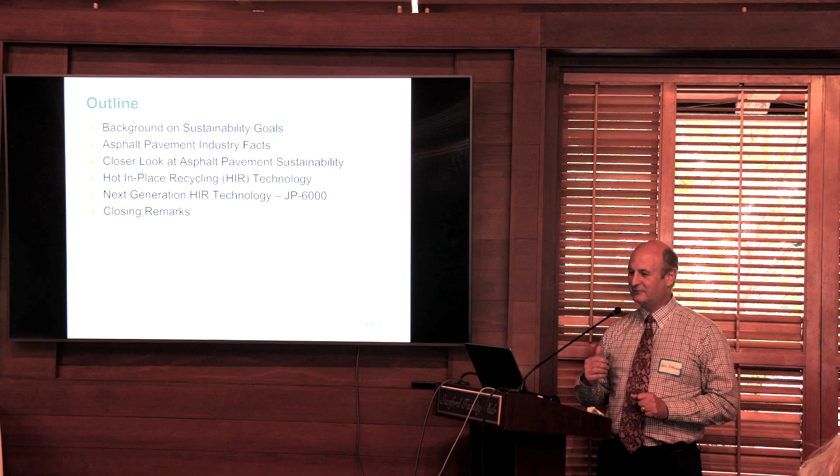Here's a quick outline of my presentation. I'm going to give you some background, a little bit of Asphalt 101, then I'll go into the sustainability of asphalt and tell you good news stories and bad news stories. Then I'll talk about in situ thermal regeneration, also known as hot in place recycling, and then the next generation of hot in place recycling technology, and then some closing remarks.

As background, I think you picked up that I'm a pavements construction engineer, but more than an environmentalist. However, let's put some context to this. In terms of sustainability, there is the United Nations Paris Agreement, which nations have signed on to, to address climate change, which is a global emergency. Emissions need to be reduced by 45% by 2030 and reach net zero by 2050. That's not too far away, and that's a commitment of the countries that have signed on to this Paris Agreement. This requires governments to take bold and immediate steps towards reducing those emissions now.

Another United Nations sustainability goal, different from the other one, is sustainable consumption and production. Our planet is running out of resources, and governments need to implement and enforce policies and regulations that include promoting circular economy practices and supporting sustainable procurement practices.

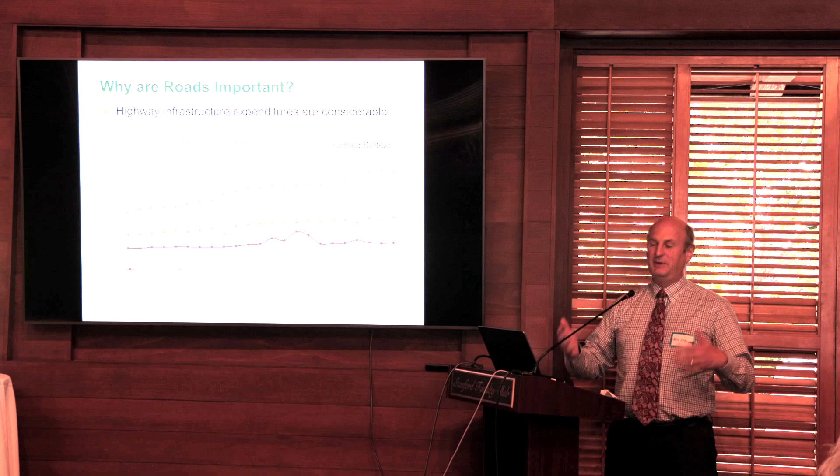So why are roads important? Well, because we spend a whole lot of money on highway infrastructure. They're considerable. This graph is from the Federal Highway Administration, for all of the U.S., all of the various government funding levels' spending. You can see the top line there, I think it's orange, spending as of 2022, $128 billion per year on highways. There are some other related highway expenditures here, but the big one is there. So $128 billion a year—there is some really good opportunity if we can bring some sustainability into our transportation or highway expenditures. So that's the good news.

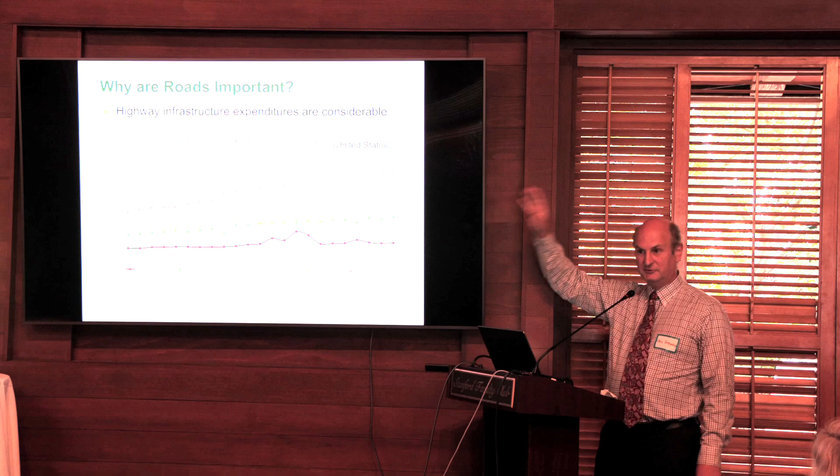Even better for those of you in government, when you look at that, depending on your level of government, you're making considerable expenditures of your budget for transportation and highways. Likely not your largest expenditure, but one of your biggest ones. But if you look at it not as expenditure, but as procurement, this is probably your largest procurement expenditure.

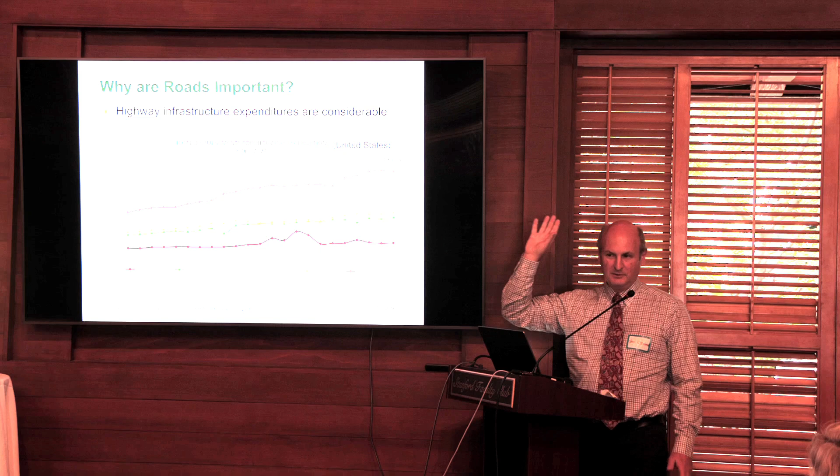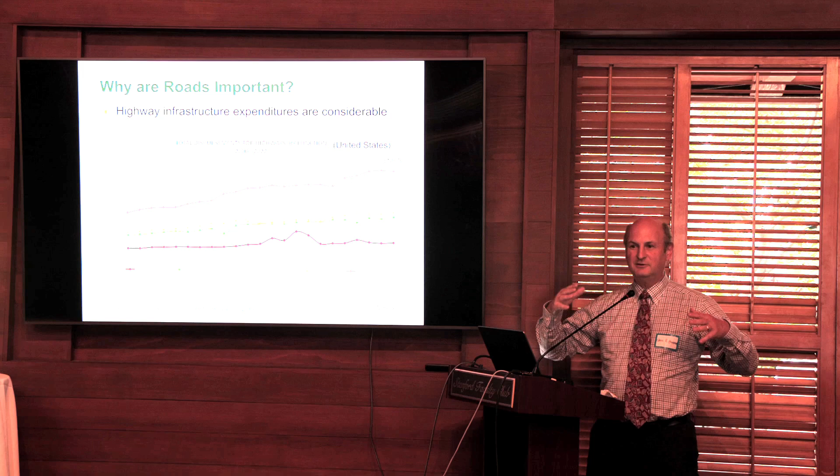Because of that $128 billion, I would say 95% of that is procurement—hiring construction firms to rehabilitate your existing roads or build new roads. Let me put that in perspective: we're not building that many new roads. We are pretty much spending the majority of it rehabilitating our existing roads. And that's mostly procured through open tenders to do this work. Some of your other expenditures, like paying teachers and so on, are very worthwhile, but don't provide the same sustainability improvement opportunities.

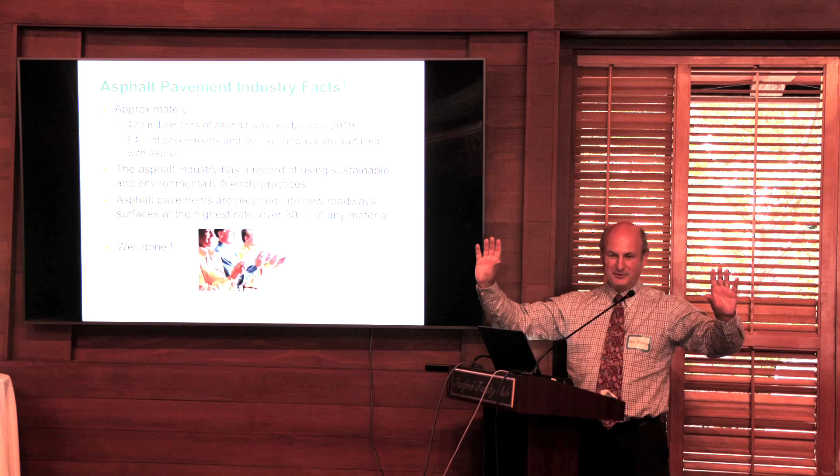Asphalt—oh, we just love it. Asphalt pavement industry facts: approximately 420 million tons of asphalt were produced in 2019, the last year for data. I'll give you some more data from other years. 94% of paved roads and 80% of runways are surfaced with asphalt, so it is a major material used for pavements. This is for America.

The asphalt industry has a record of using sustainable and environmentally friendly practices, so that's good news. Asphalt pavements are recycled into new roadways at one of the highest rates, over 90%. So again, this is good news. The asphalt industry tells you this is good news, and it is good news—we recycle those pavements. That's great.

However, let's take a closer look. Reclaimed asphalt pavement is asphalt material that is reclaimed from the pavement, either through a milling machine that grinds up the existing roadway and takes it back to the hot mix plant, or full depth removal, where a backhoe or an excavator removes that asphalt in big chunks, sticks it on a truck, takes it back to the asphalt plant.

RAP is approximately 95% good quality road construction aggregate and 5% asphalt binder. That's the black glue that holds it together. These are valuable materials for reuse. Nobody wants to put them in a landfill. Why would you want to do that? The aggregates are good, and it's got asphalt cement in it as well. Why not recycle it? And that's what the industry is doing.

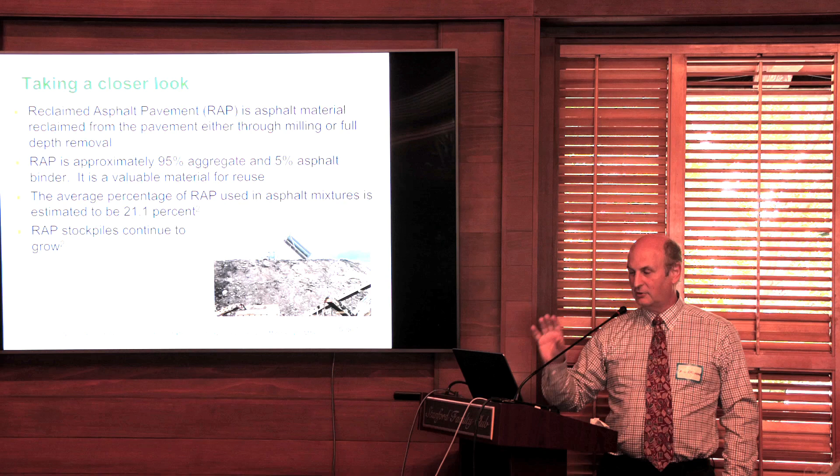So again, continuing to take a closer look at some of the maybe not so good stuff that gets lost in this message. And again, what I told you is all true, and it's all to be commended. But at the same time, a significant portion of asphalt pavement is downcycled into a lower function, such as the granular base material underneath the asphalt layer. You can kind of see that here.

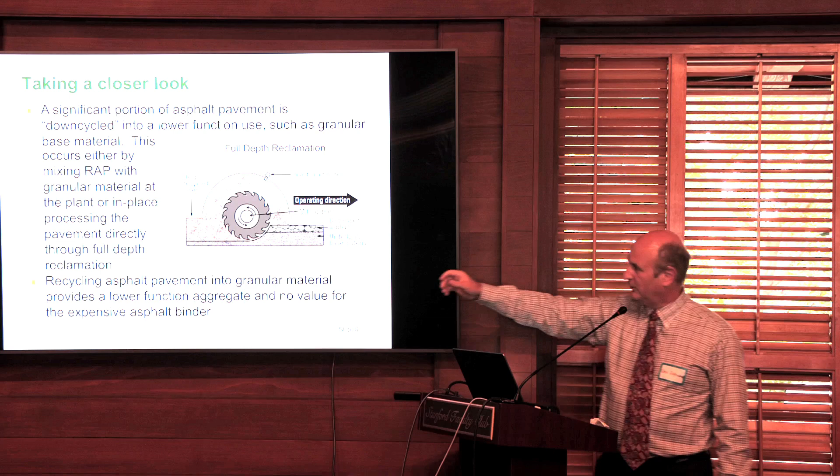Typical asphalt pavement is some layers of asphalt over some granular material. That's how roads are built. And so some of it is...

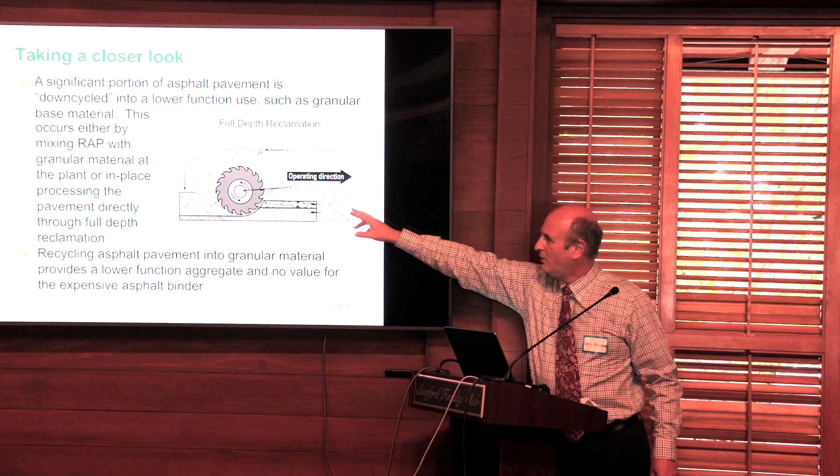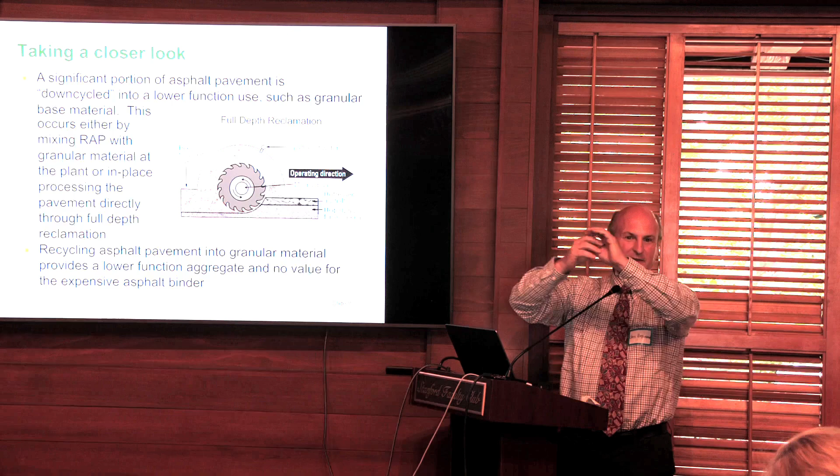This occurs either by taking RAP that is milled, taken back to the plant, mixed with granular material, and then put out during construction, or through a process called full depth reclamation, which I'm going to educate you about right here. It's basically a big milling machine that goes there and takes your old distressed pavement with lots of cracks in it and basically pulverizes it into chunks of RAP or asphalt like this, and mixes it with that granular material, and then behind it, it's all regraded and compacted nicely, making good base material.

But unfortunately, you're now using it as a granular material, not as an asphalt pavement. That's a lower function where you're taking higher quality aggregates that should be used in asphalt and using them as base material, which doesn't need those high quality aggregates. And you're getting no benefit from that 5% that was in there.

That is your asphalt cement liquid. And I can tell you aggregates are not that expensive when you compare the price of asphalt cement or the crude oil component. That stuff is expensive, and it's such a shame that you're not getting any use out of it. So I'd like to think that we can do better.

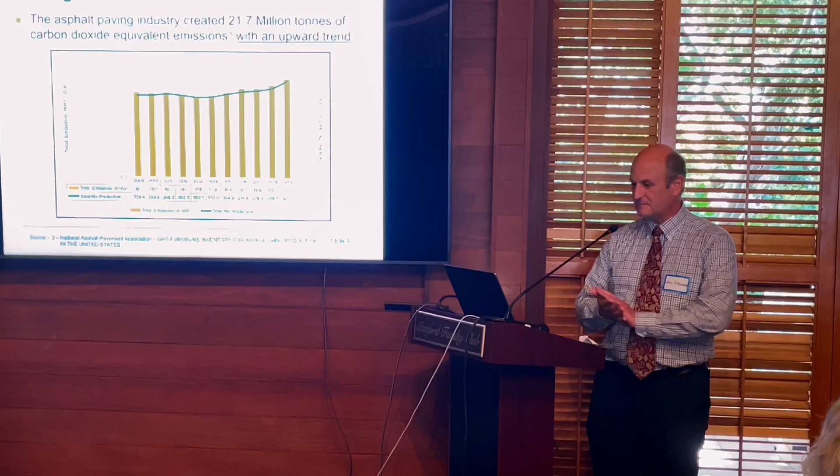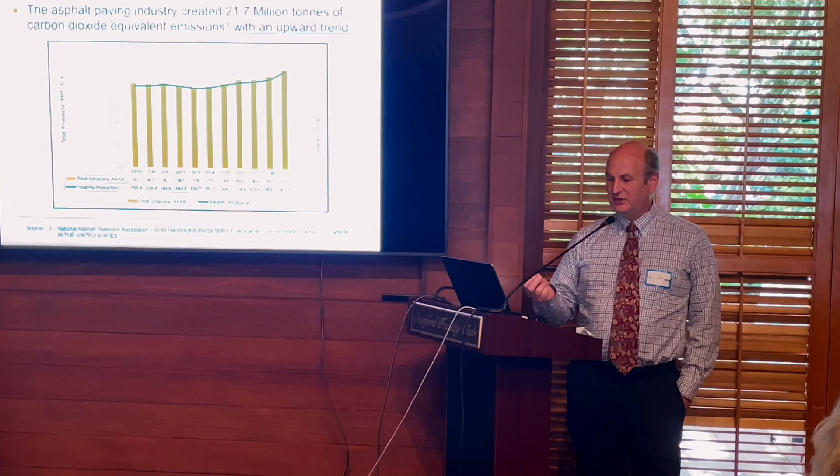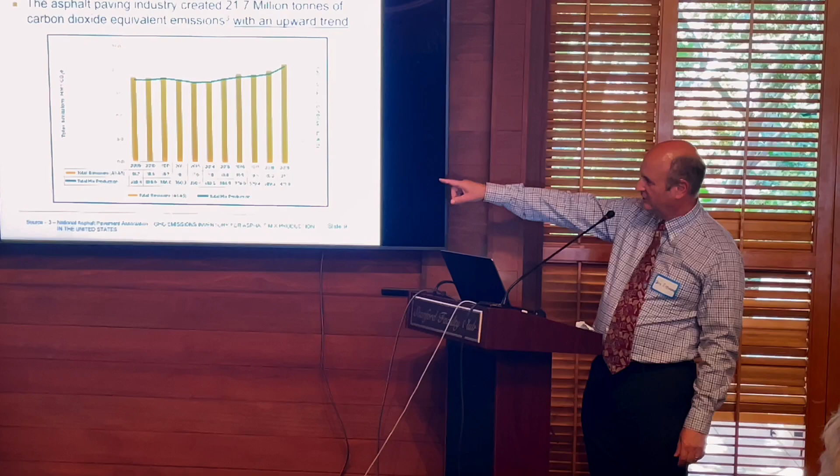So again, continuing to take a closer look at things, the asphalt paving industry created 21 million tons of carbon dioxide equivalent emissions. Here are those trends on this chart. Looking at the yellow bars, that's your emissions, and the axis is labeled on the left-hand side of that chart. So there's your emissions from 2009 to 2019, and the green line is the amount of total hot mix produced in the United States. You can see it's kind of flat with an upward trend.

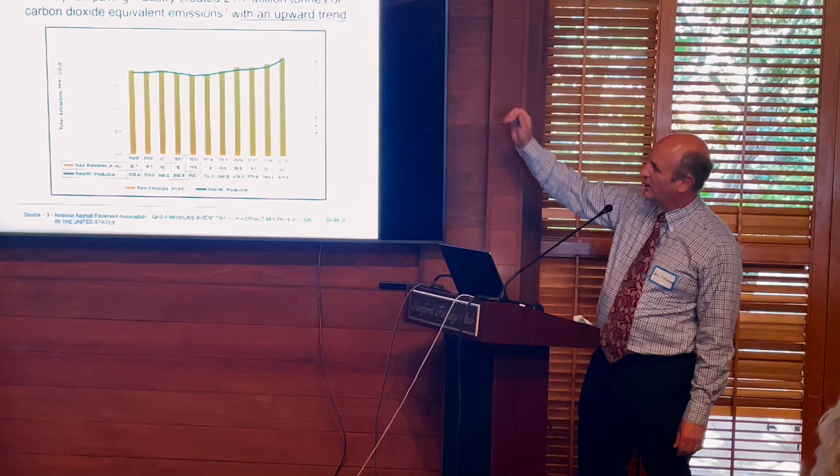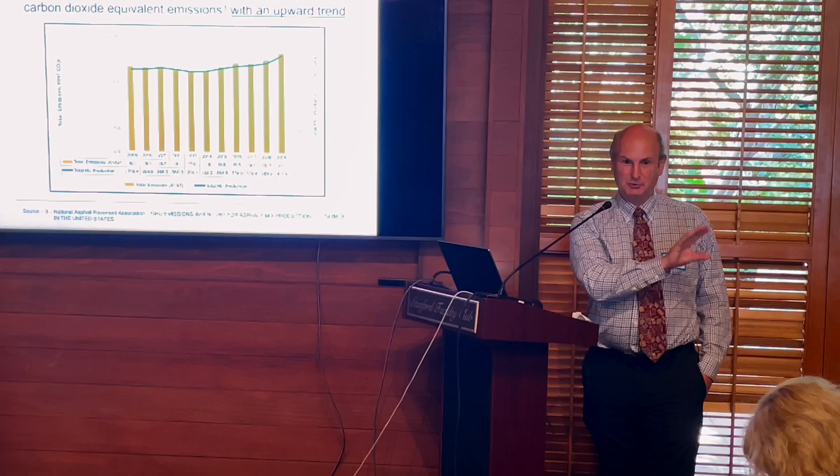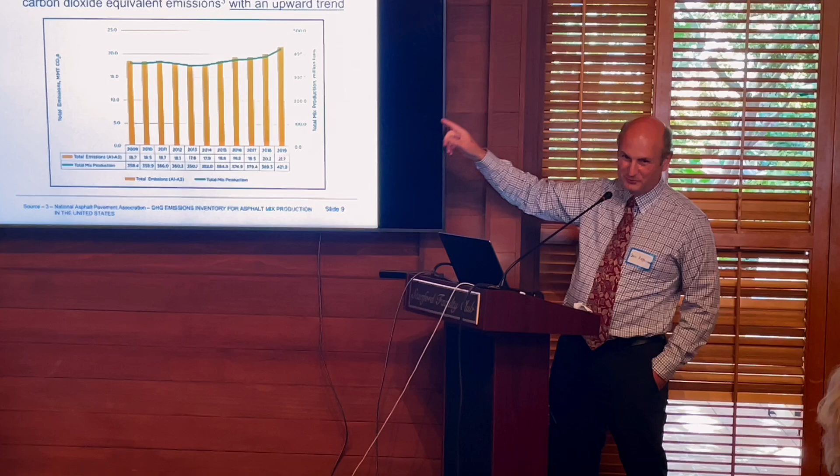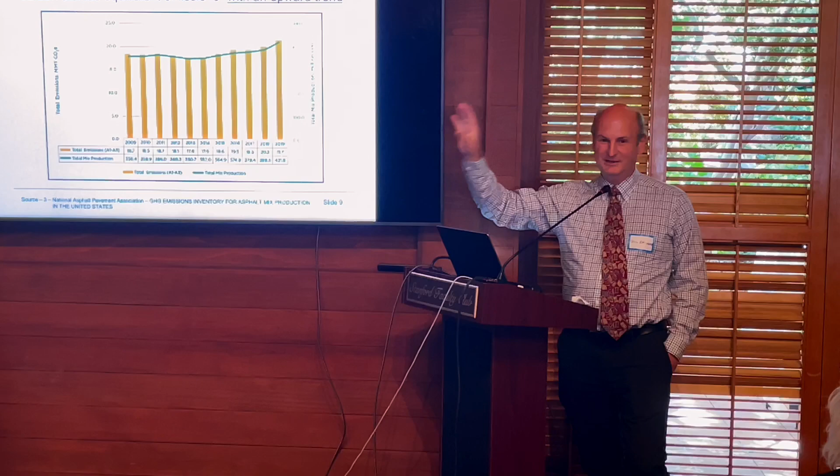So coming back to one of those earlier slides, we're going to meet, I think it was a 45% emissions reduction by 2030. There's some smart people in the room here that are smarter than me, because quite honestly, if you're asking me how this trend line here with the yellow bars on emissions is by 2030 going to get you a 45% reduction in emissions, I'm not sure how that's happening on our current course of doing the same thing over and over again, just hoping that magic line, or those bars, will start dropping. So doing what we're doing isn't going to get us there. We need to do better.

So that comes to hot in place recycling. Isn't this great? And more education on asphalt and pavements.

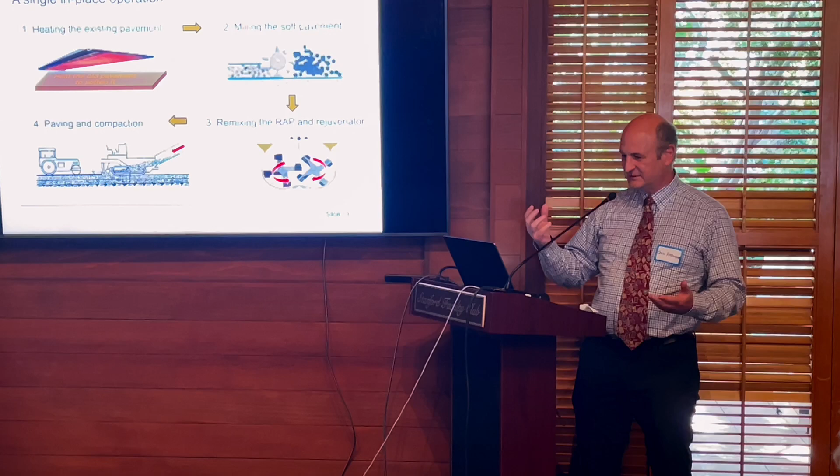So hot in place recycling is a single in place process where out on the road, equipment comes and it heats the existing distressed pavement, and that softens it up. And then that soft pavement, that hot, soft asphalt is then milled up, and then it's taken and it's remixed.

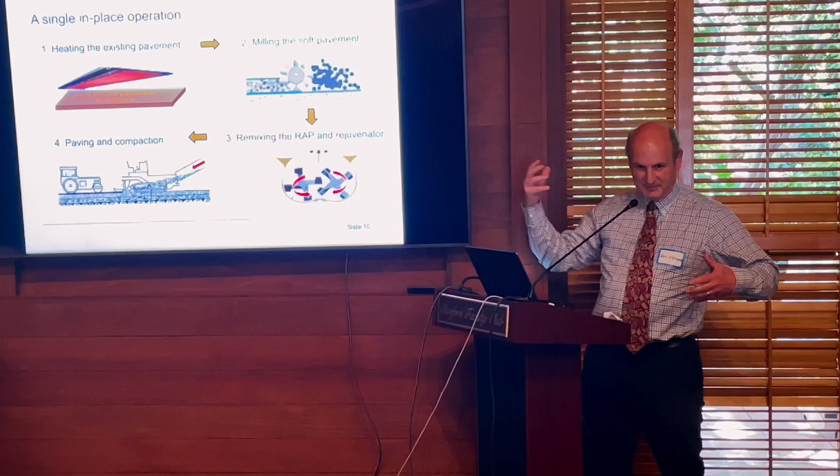That existing pavement is milled, is remixed with some rejuvenator, and that rejuvenator takes that old asphalt that may be 25 years old, and it's hardened up. It's a harder base material. It's been softened because you heat it, but once it cools down, it'll be hard.

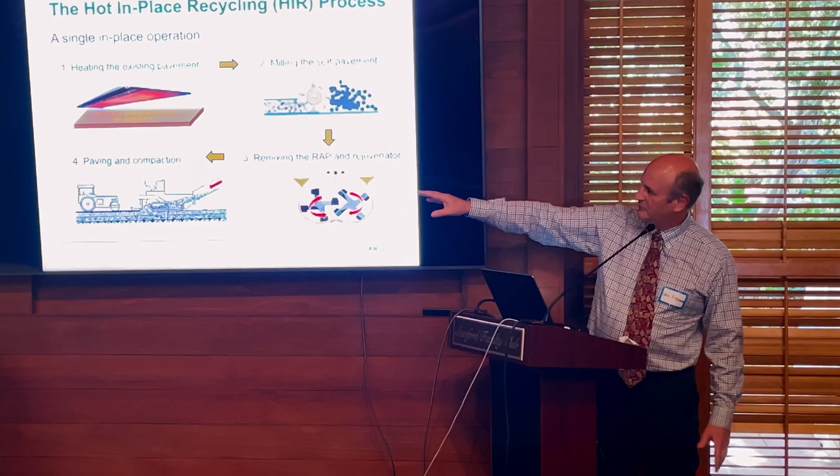So you add in a rejuvenator that sort of softens and re-energizes the asphalt cement in there, and then you run it through a paver and compact it, and you've got a rehabilitated roadway to drive on. That's all done in place.

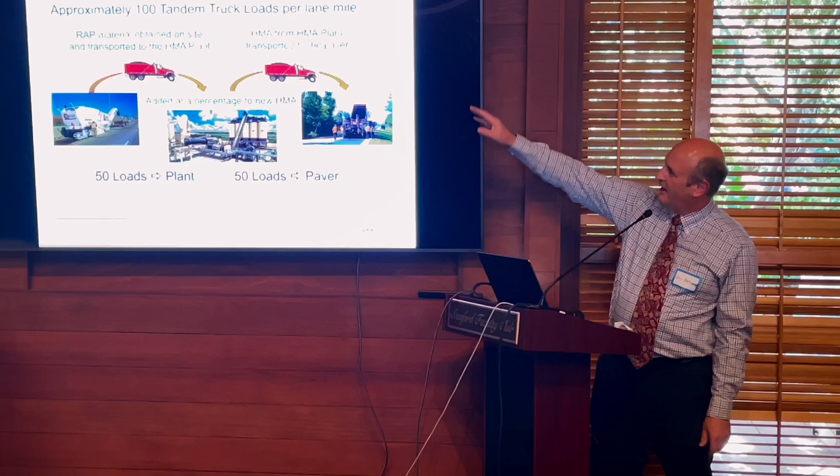Anyways, and then at the asphalt plant there in the middle, you then take 20% of that reclaimed asphalt pavement, on average, you mix that with all new material, heat it up, mix it together, and then truck it back to the paving site, and you run it through your paver. And for each lane mile that you reconstruct, there's 50 loads going to the plant and 50 loads going back to the paver. So to put that in perspective, you're using new material that has to be trucked in from a quarry or a pit.

So just to give you some perspective on comparing the two processes.

So what are the advantages of hot in place recycling? Well, the first one's one of my favorite green reasons to use hot in place recycling. The cost is significantly cheaper than conventional hot mix in the conventional process of milling and filling. The cost savings can be from 30 to 50%. That's my favorite type of green, and it's one more great example of how being green and sustainable can be cheaper.

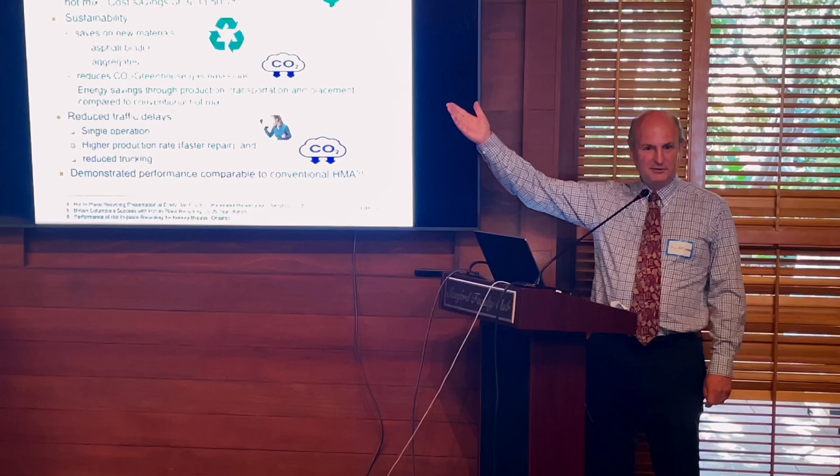Some of the more environmental sustainability aspects is it saving on new materials. Asphalt binder, it's a petroleum product, it's very expensive, and in some ways it's not renewable.

Aggregates, again, are fairly cheap, but they have to be trucked from a quarry or a pit that's often far away. Surface course aggregates can be even farther because they have to have special qualities that prevent them from polishing so that you have skid resistance. And I don't think so much in California, but certainly places like Toronto, you're trucking your high quality skid resistant aggregates over 100 kilometers, which would be 60 miles, sometimes 200 kilometers in the Toronto area, because the aggregates you have in Toronto polish and don't provide you skid resistance.

So obviously there's challenges that way, not from the environmental side of this, but just running out of those aggregate resources that are suitable. There's lots of aggregates, but are there aggregates that's suitable for the purposes that we need them for? The greenhouse gas reductions in terms of less transportation and other aspects as well in the process.

There's energy savings through the production, transportation, and placement of the materials compared to the conventional hot mix and mill and fill. Another important one is the reduced traffic delays.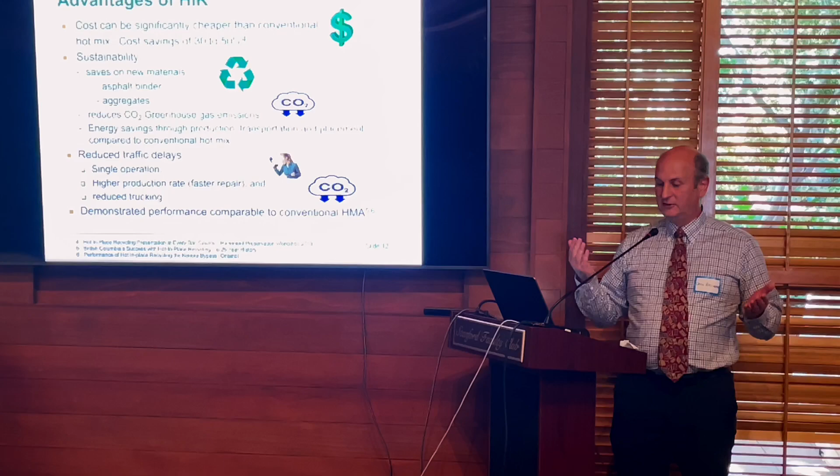Again, hot in place recycling does it - it's a train, but it does it all there on site in one operation. You also have higher production rates, so it's moving down the road faster than a conventional paver.

You know, obviously the reduced trucking of the material because it's not going back to the hot mix plant, and also bringing new material to the hot mix plant.

And of course, you can't look at sustainability without looking at performance. And this has demonstrated performance comparable to conventional asphalt. There's been a lot of historical use of hot in place recycling. British Columbia does a lot of this. Ontario does some of this. And they've done a lot of studies and found that it's comparable in terms of performance.

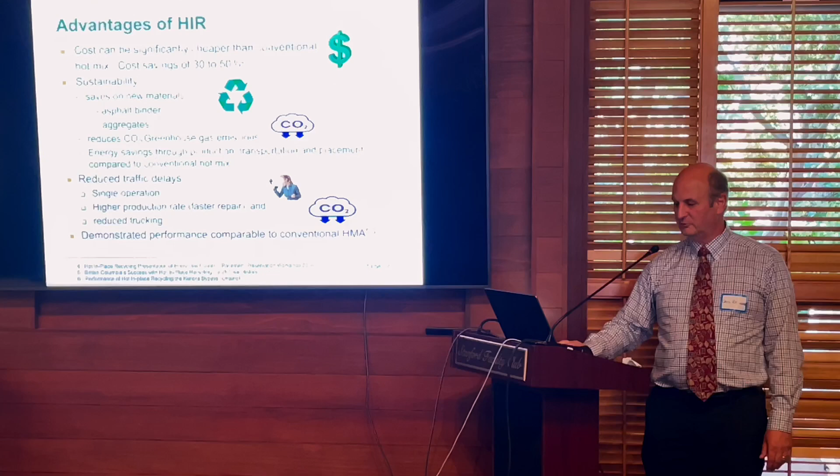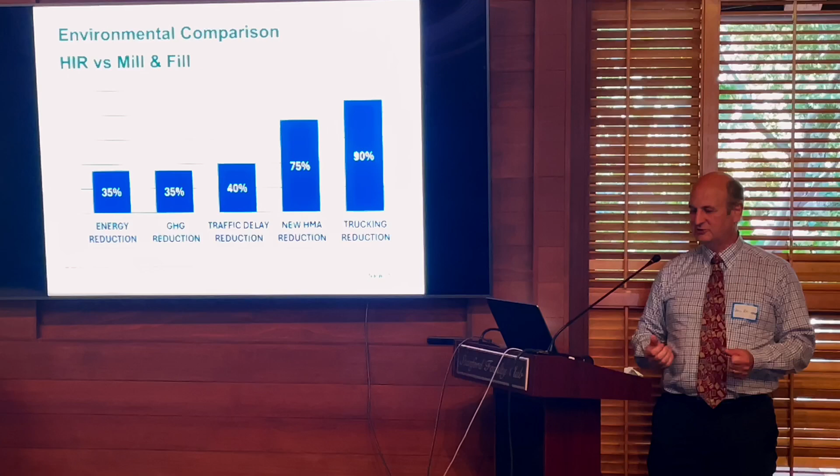Here's a quick sort of comparison of some of the general savings or comparisons in terms of 35% energy reduction, 35% greenhouse gas reduction, traffic delay reduction of 40%, new hot mix asphalt reduction of 75%, and trucking reduction of 90%.

So what are some of the challenges, or what is the challenge with hot-in-place recycling?

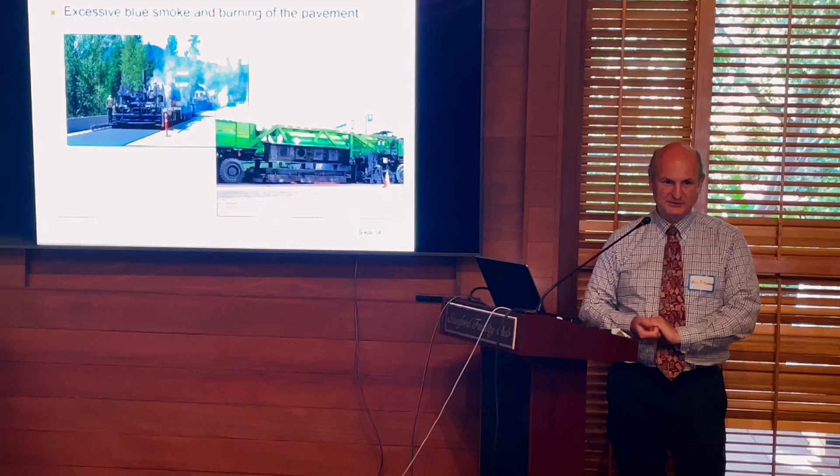This technology has really been around since 1930, but it's never really gained mainstream acceptance. And one of the reasons is some of those technologies were not the best.

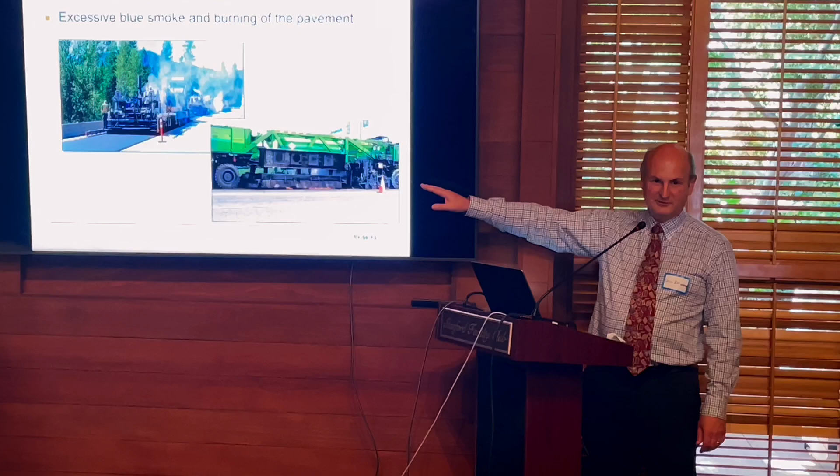Here's an example. On the left, you've got a hot-in-place process. There's a lot of blue smoke there. You're burning the asphalt, which is hurting the quality. You're also creating a bit of a safety hazard for motorists. I don't think I'd like to be one of those people on the crew inhaling those fumes and stuff like that. On the right side, you can see the open flame hitting that asphalt, and that's not good for the asphalt.

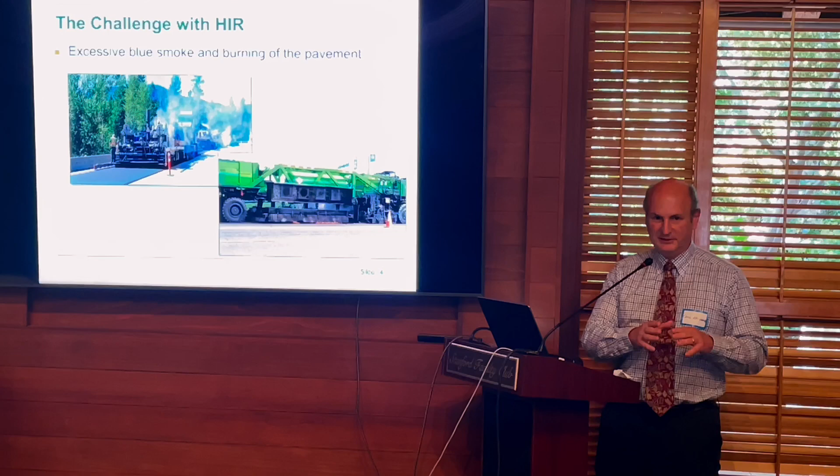It's basically burning that asphalt, and that's not good for the engineering properties of that material. Even if you try softening it, because it's burnt, it won't give you the desired performance you're looking for. Most jobs don't have this, but it just takes one job in every 5 or every 10, and someone says, I'm not doing that again, or it sounds good, but it just didn't work. And that's been one of the challenges with hot-in-place recycling.

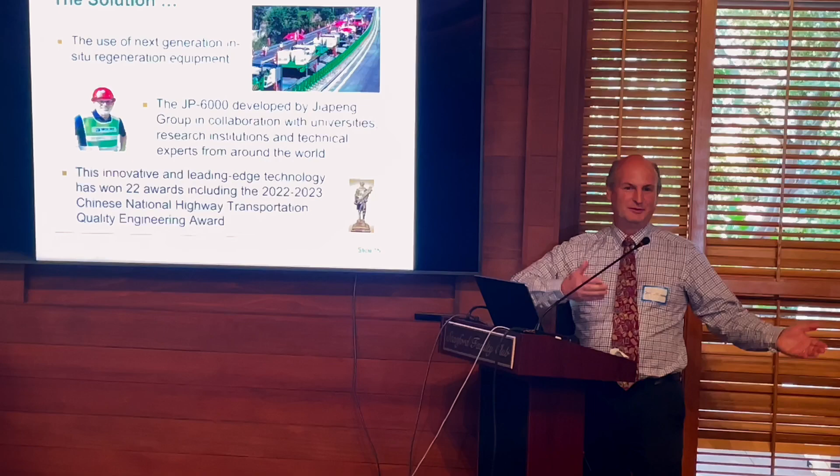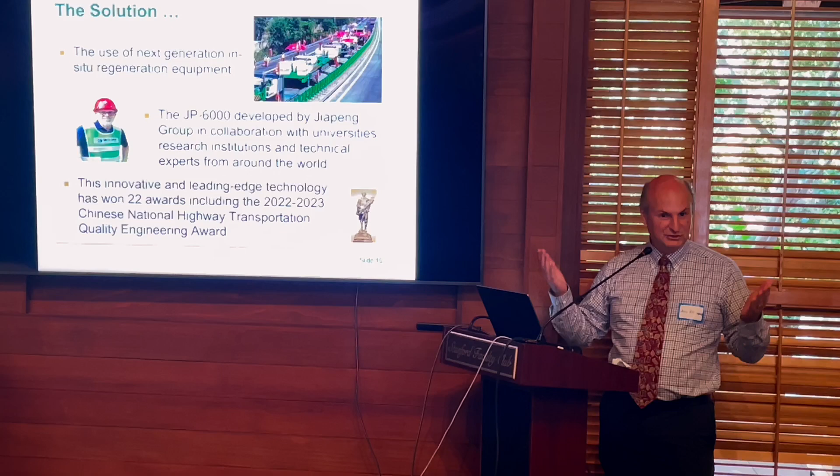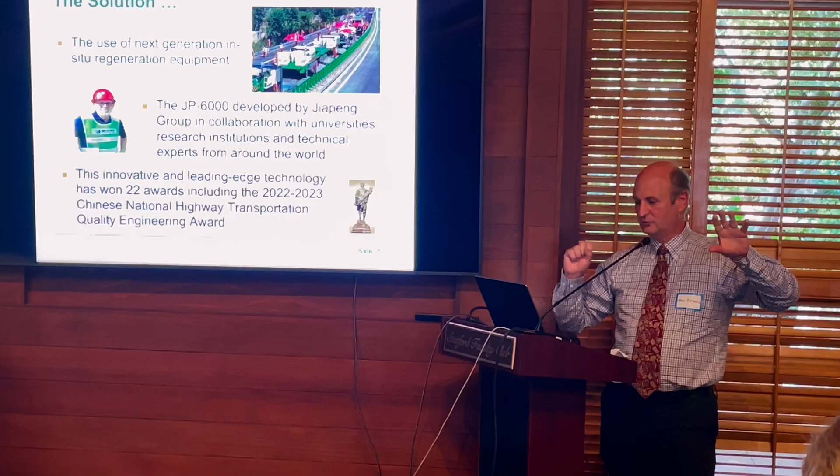However, technology is improving, and there is now the next generation of in-situ regeneration equipment. This is the JP6000. It was developed by the Jiapeng group, which is essentially a partnership with the JP Roadtech group, and also in collaboration with universities, research institutions, and technical experts from around the world.

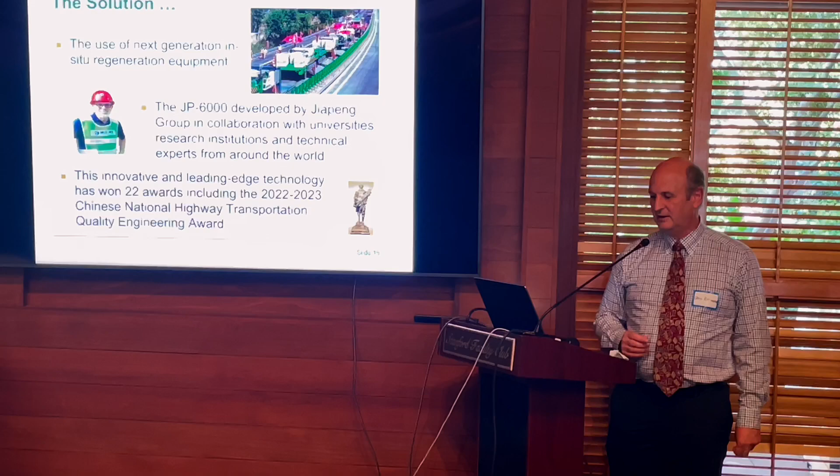The Jiapeng Group is a Chinese company. However, it's really a collaboration of many international people, including one of the main technical people there, who's a Canadian. So this innovative and leading edge technology has won 22 awards, including the Chinese National Highway Transportation Quality Engineering Award. So what makes this better?

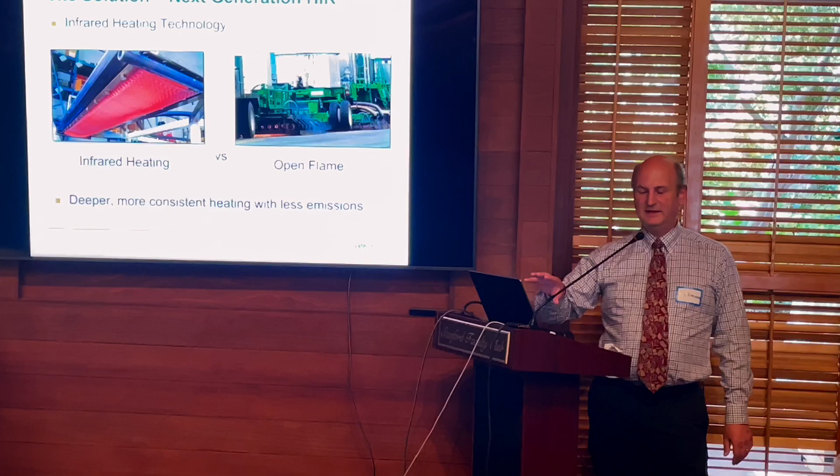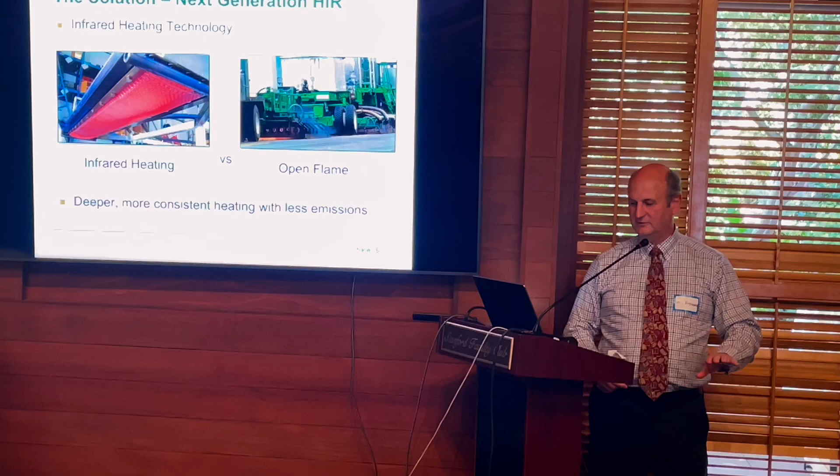Well, first of all, it's the way it heats the pavement. It uses infrared heating technology versus the traditional method of open flame. This gives you deeper, more consistent heating with less emissions.

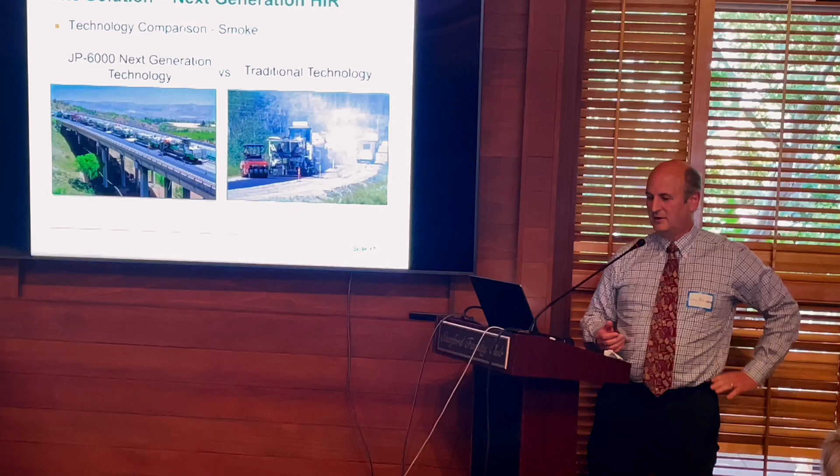A second improvement is the smoke and fumes that come off. You can see on the left, the JP6000 technology - there's no burning of the pavement, there's no smoke coming off - versus on the right side, that traditional technology.

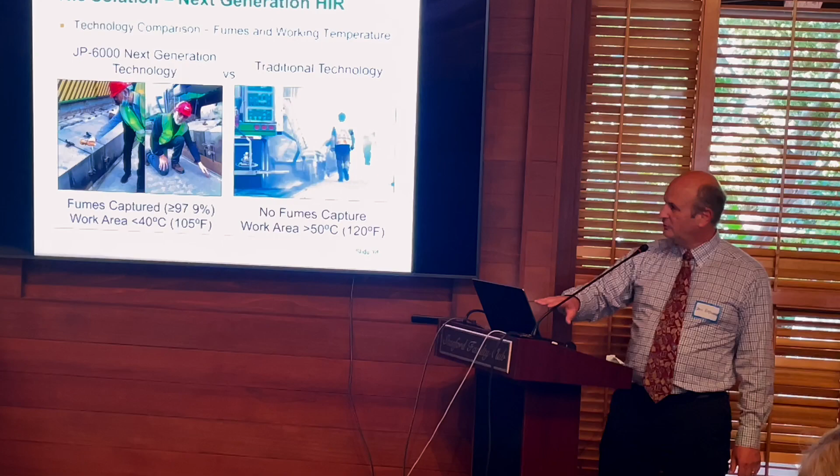Another one is fumes and working temperature. On the left side, the JP6000, there's no fumes, and the temperature is about 105 degrees Fahrenheit, or less than 40 degrees Celsius, versus the traditional technology, where it's over 50 degrees. A lot of that heat being generated is just flowing out, versus being contained under the unit to the pavement. So that's what you want to do, and this is doing it.

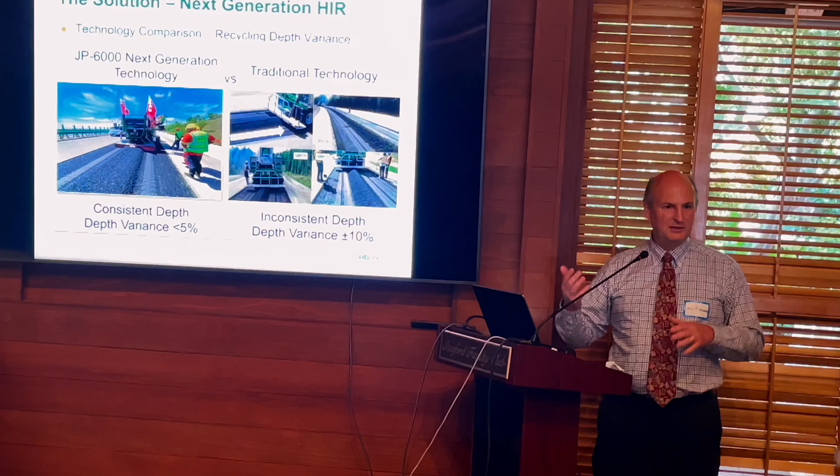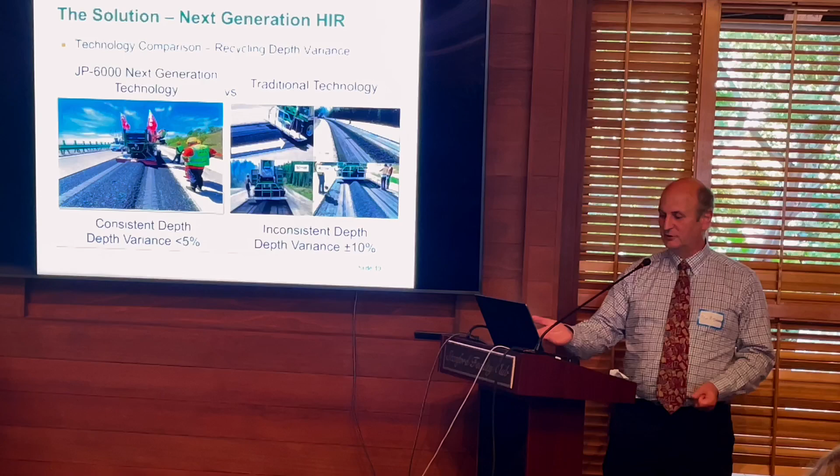Recycling depth variance. One of the challenges with the old technology is it would overheat it or underheat it, and there just wasn't quality control. You get a very consistent depth with the JP6000. The depth variance is typically less than 5%, versus the traditional method where it's about 10%, twice that.

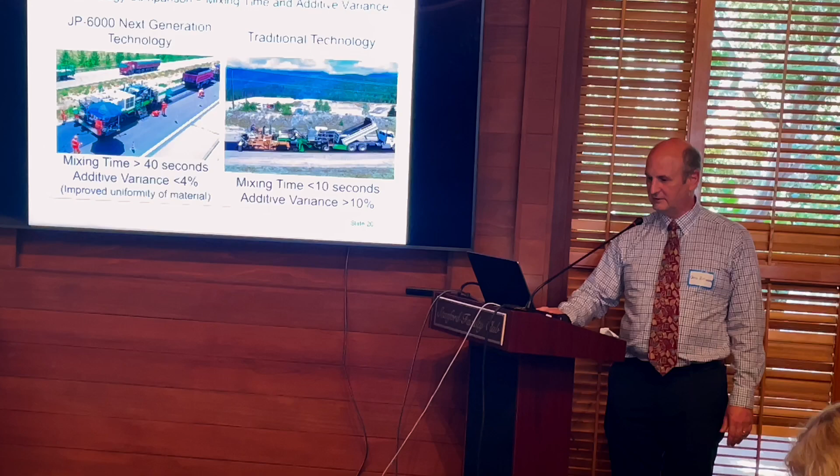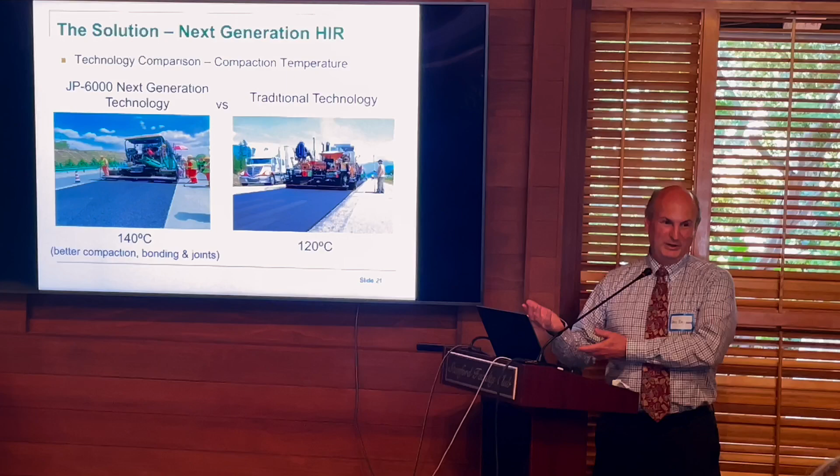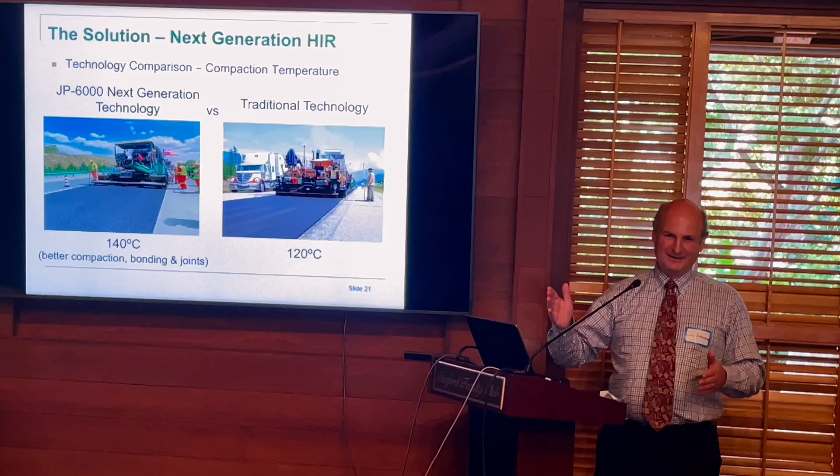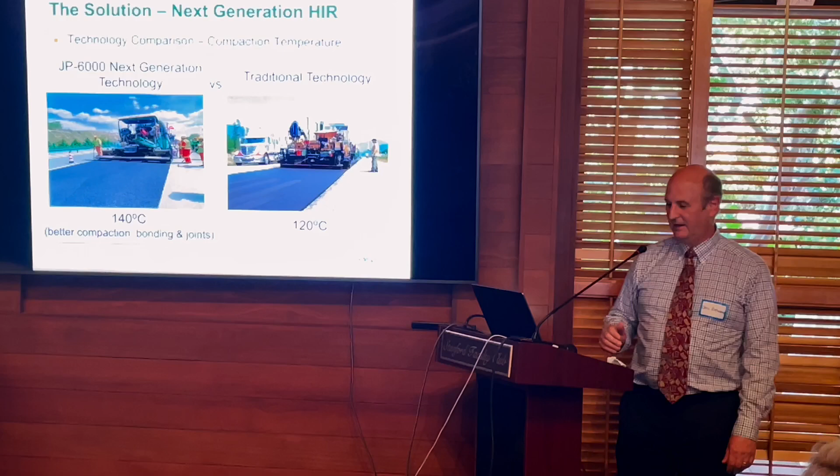Also, the temperature achieved in the product: typically the traditional technology, when it's not burning, or even sometimes when it is burning, gives you 120 degrees, but the JP-6000 is consistently heating to 140 degrees Celsius, so you get better compaction in the material. This gives you, in addition to better compaction, better bonding and better joints. I don't know, in Canada, maybe because of the colder weather in our shoulder seasons, we have terrible construction joints between our lanes and our pavements, so it's really good that you get that improvement.

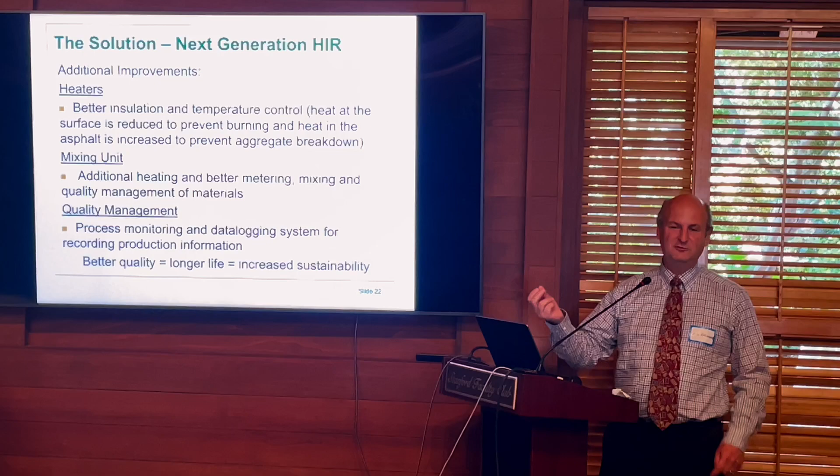Some of the additional improvements, or reasons for those improvements, are the heaters - the preheating of the existing pavement before it gets milled up. There's better insulation on those units, and temperature control - a lot of monitoring of the temperature in the equipment that allows adjustments to be made. So the heat at the surface, or any burning at the surface, is reduced, preventing the burning, but you're also getting deeper heating of the material. If you don't fully heat that pavement, when you go to mill it, if it's not been softened, you're going to start milling cooler or only warm material, not hot material, and then you're going to start breaking down those aggregates.

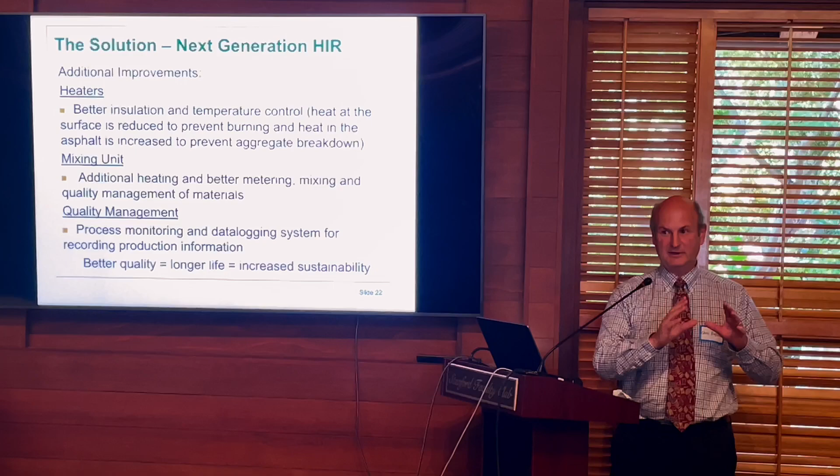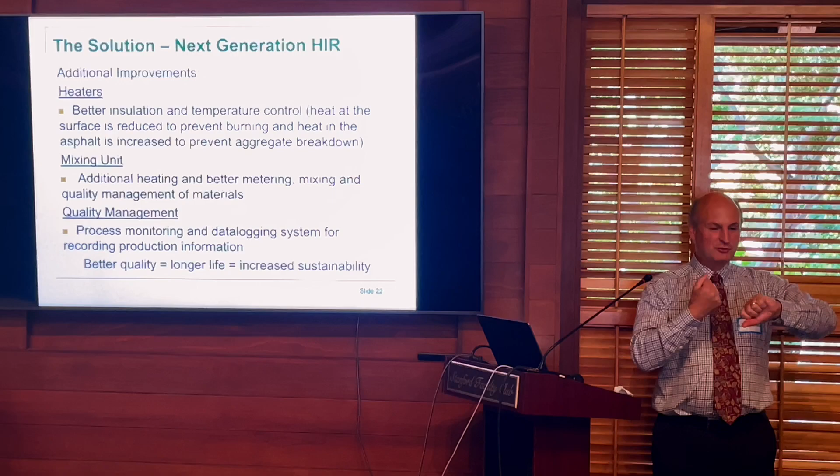Those aggregates have to be good quality, and there's a lot of engineering involved. They're not just scooped out of the ground and mixed with asphalt cement. They're engineered to give a proper gradation, with crushed aggregates so they lock together better. If they weren't crushed, they'd be round and move around, causing rutting. The gradation also makes sure everything packs properly.

That's how the existing pavement was originally designed. If you mill up an existing roadway, you're going to start breaking down some of those aggregates, changing that gradation, and not getting all the engineering out of it. So that's not going to be a good thing.

The mixing unit mixes longer and more consistently because of the metering and quality management. It's all computerized and high-tech, so they can monitor everything and make adjustments as material properties change.

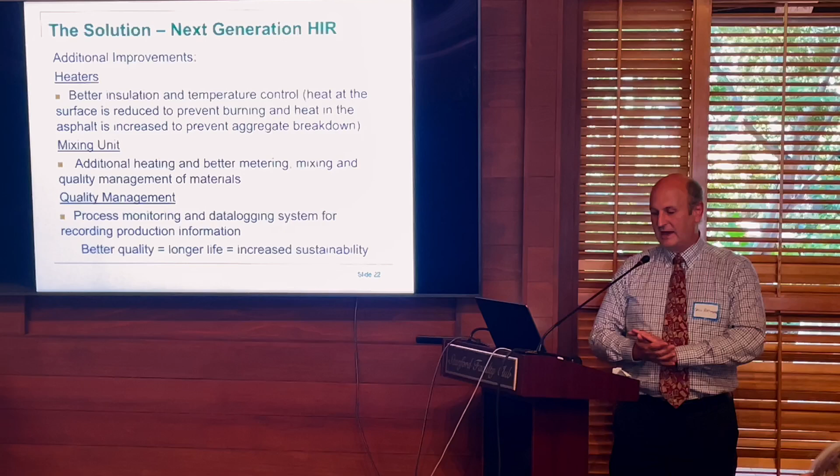Tied into that is the quality management. There's a lot of monitoring of the process, and a data logging system that saves all this information. If you're an owner like me, or was an owner—I don't work for the Department of Transportation anymore—it was always great that you could go back and see what was produced throughout the day, especially if you thought there might have been a problem. All that stuff is stored for quality management.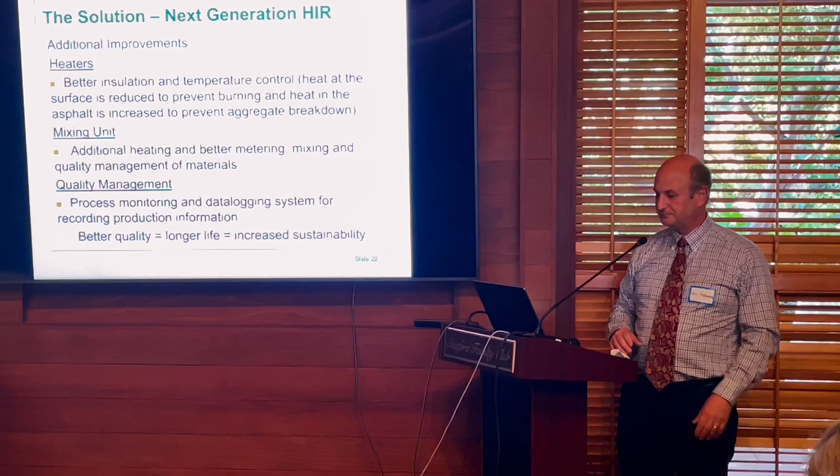So on the bottom there, better quality means longer life and increased sustainability. Someone who worked for the Department of Transportation talks about sustainability there. Better quality is one of those things that's often overlooked, but if you can get a good quality product that lasts its full life or longer, that's great.

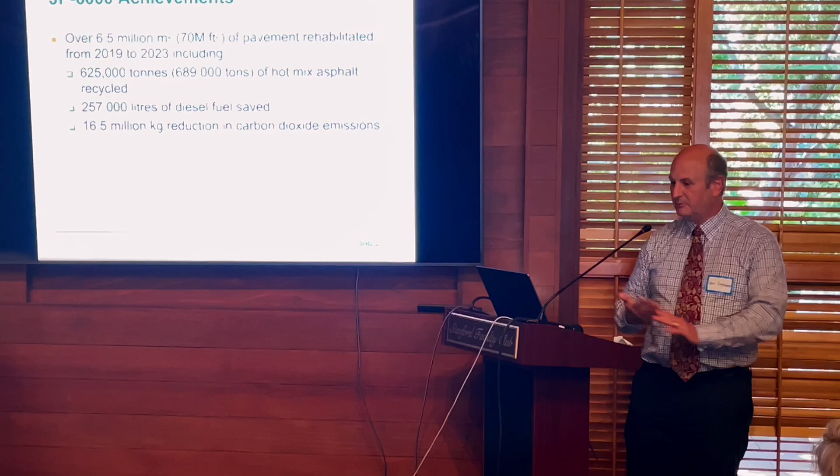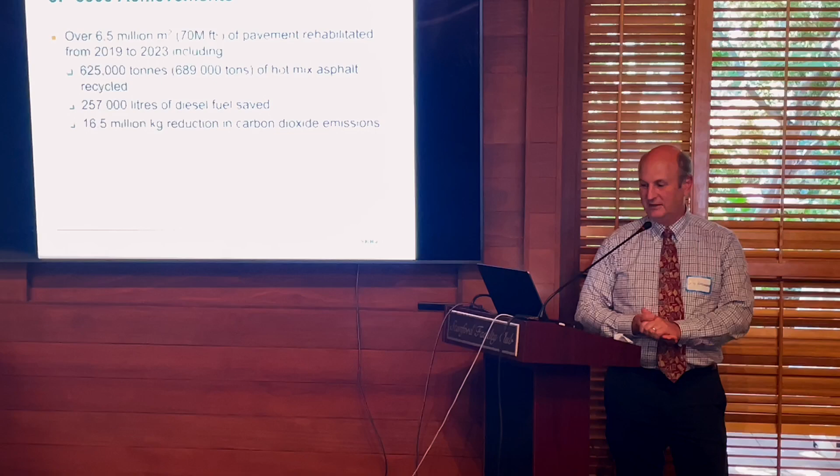Some of the achievements of the JP-6000: this is new technology, but it's done a lot of work and proven itself. Over 6.5 million square meters of pavement rehabilitated in the last 4 years, with over 600,000 tons of hot mix asphalt recycled. A lot of diesel fuel has been saved in the process because it's more energy efficient, and there's been over 16.5 million kilogram reduction in carbon dioxide emissions.

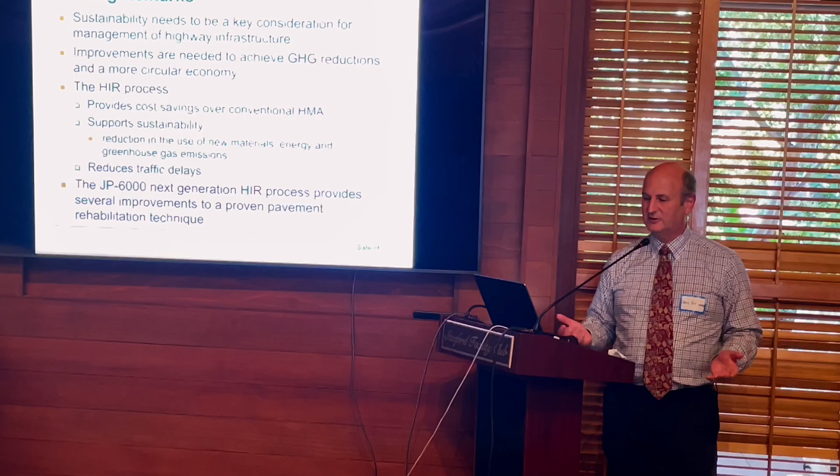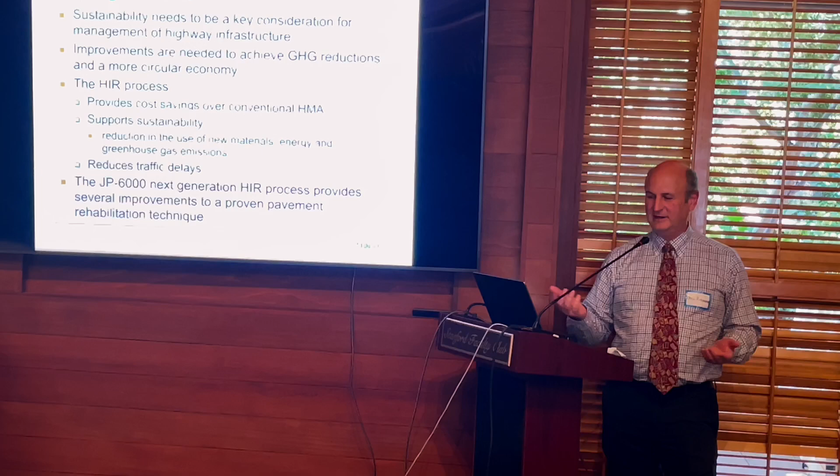So in closing, I'll give you some closing remarks. Sustainability needs to be a key consideration for the management of our highway infrastructure. Improvements are needed to our current way of doing things if we're going to meet the greenhouse gas reductions and the circular economy that countries have committed to.

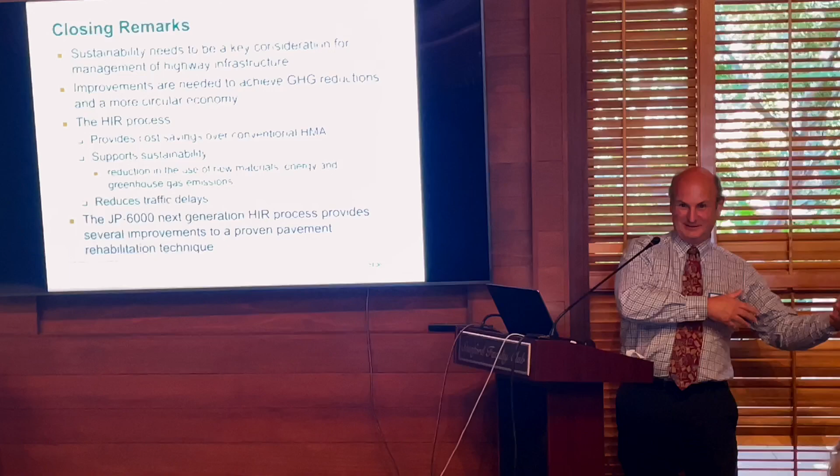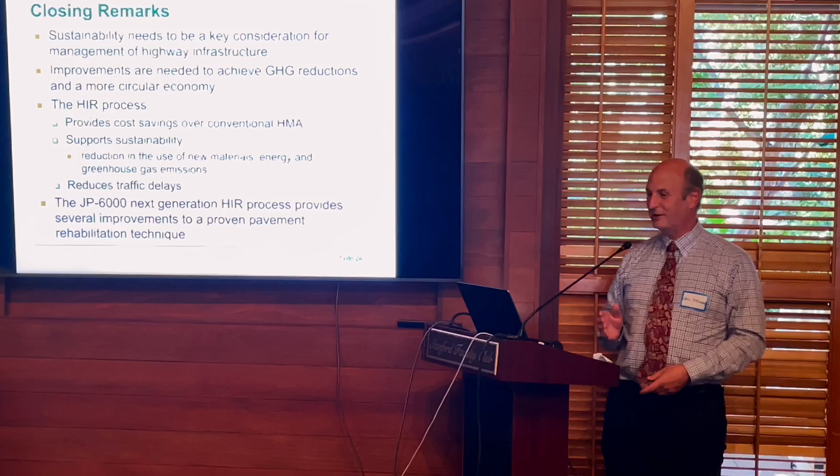Depending on what president comes in next year, maybe someone wants to back out of those commitments. It doesn't matter—we still have a responsibility to look at sustainability, regardless of being part of the Paris Agreement or not.

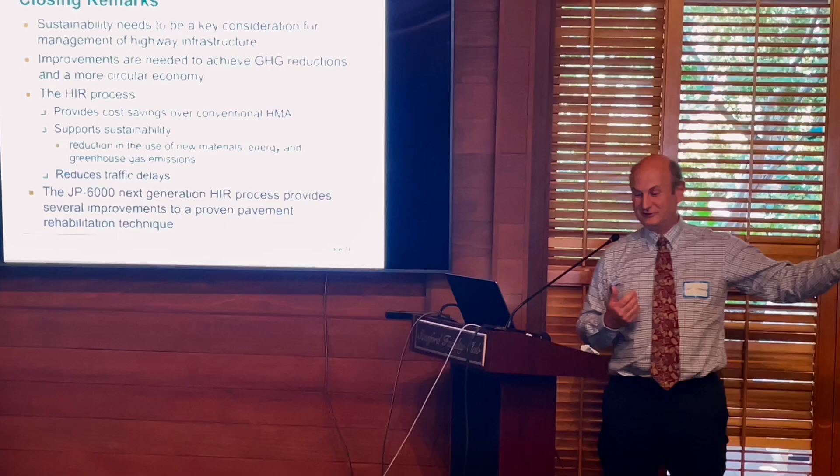Through the next generation JP-6000 process, you can find cost savings. I learned today that governments don't have endless budgets for their transportation needs, so this would be great if you can achieve cost savings. You can also support sustainability through reducing the need for new materials, energy use, and greenhouse gas emissions.

Reduce traffic delays—anyone who works for a transportation agency knows how people complain about traffic delays. You do the work at night because you can't close the lanes down and do this work during the day. I kid you not.

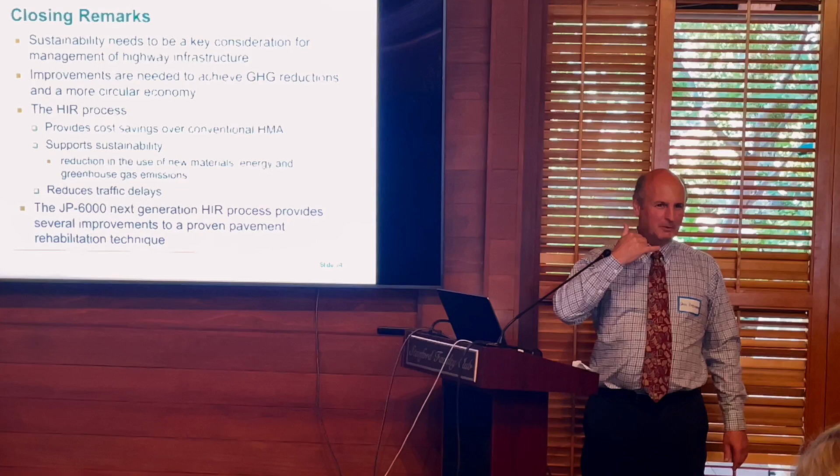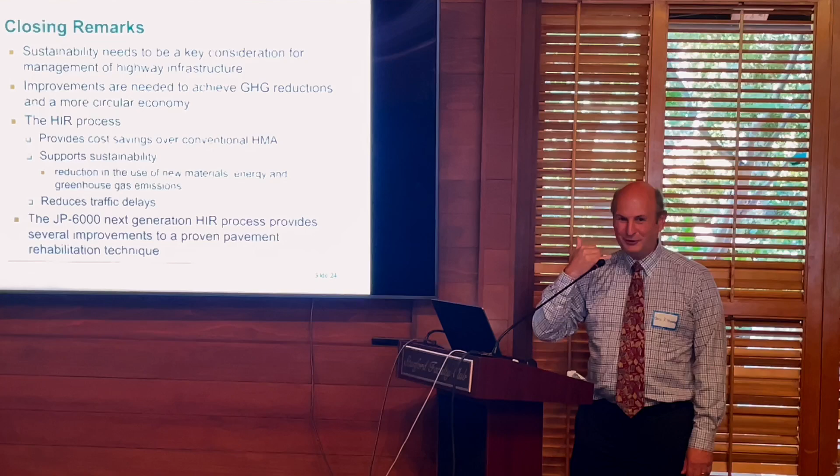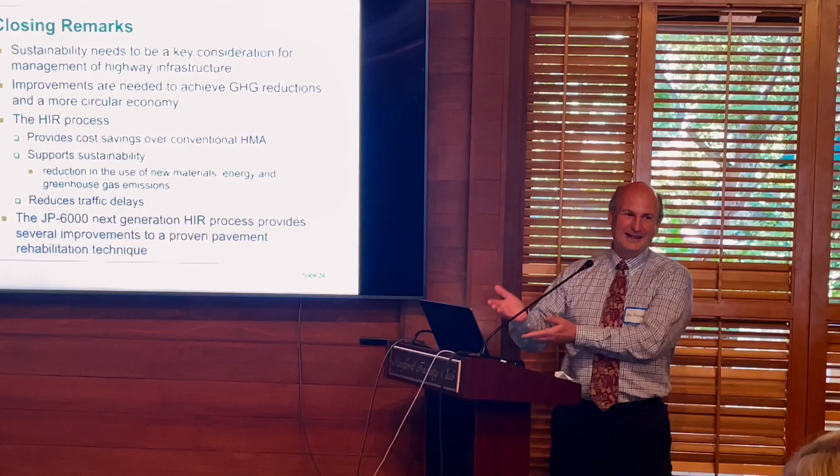People call you up the next day wanting to complain about being stuck in traffic. 'Oh, where? Oh, on this highway. Oh, when was that? It was 11:30 at night. I was coming home and got stuck in traffic for 10 minutes. Why would you be doing road construction in the middle of the night when people are in a hurry to get home?' And I'm thinking, oh my gosh. You just bite your tongue, thinking that 10-minute delay at 11:30 p.m. would have been 2 hours if we'd closed the roads during the day. So no matter what you do, people don't like traffic delays—let's do whatever we can to minimize them.

I think a really great opportunity here for everyone is the use of the JP-6000 hot-in-place recycling technology. But it's going to take communication by all of us to find a way to bring that into our highway infrastructure and how we rehabilitate our roadways. Thank you.